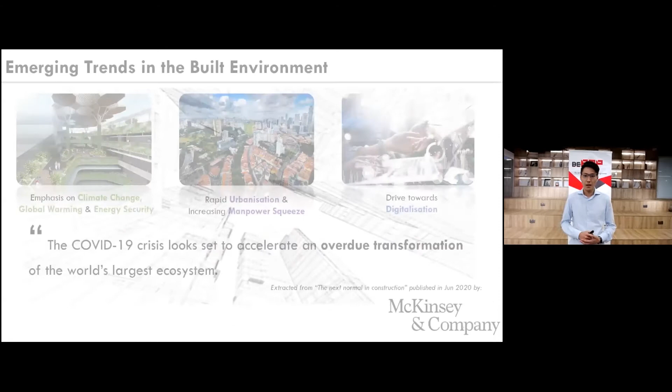The need for the built environment sector to embrace changes through business process re-engineering and technology adoption has never been greater than in recent months. Globally, 3 key trends are shaping the built environment sector. First, climate change and global warming have driven the need for more energy-efficient green buildings. Second, rapid urbanization and increasing manpower squeeze have also pushed the use of more technology in place of manpower. And third, advancements in digital technology are making smart building, digital design, and construction a reality.

The COVID-19 situation has also added new impetus for off-site manufacturing, safer workplace, and remote operations. Recognizing the 3 key global trends which are shaping the sector, we therefore started our transformation journey even before the COVID-19 pandemic. The launch of the Construction Industry Transformation Map, or Construction ITM for short, in 2018 sets the vision for an advanced and integrated built environment sector, led by progressive firms and a competent workforce. This vision is supported by 6 key thrusts to build innovation acumen, capabilities, skills, and markets through strengthening collaboration and progressive regulation.

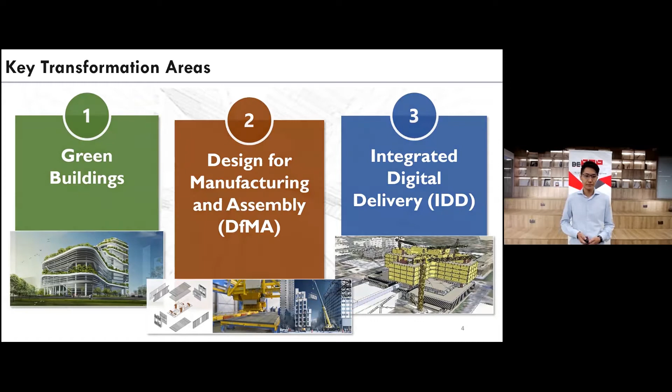To drive innovation and enterprise in these focus areas, BCA adopts a holistic approach. For example, with BEAMP, built environment firms are encouraged to pose their business challenges to the global innovation community. This is to widen the innovation base and to allow even proven solutions from outside our sector to be adapted for our needs.

Shortlisted innovators will develop the solutions with the advisory from the challenge owner, who will also provide a test bed for the solutions. In the process, innovators will also receive co-funding support and be plugged into the sector for market development.

While BEAMP provides a platform to drive innovation development, we are also mindful that regulations clearance may sometimes impede adoption for certain technology, particularly when the technology is new in Singapore. Therefore, BCA also provides a one-stop solution called the Build Innovation Panel, or BIP for short, to facilitate the review of existing regulatory requirements that may discourage innovations.

For innovation projects which require guidance in regulatory matters, BIP will help to pave the way forward at any juncture during the course of innovation development. We also like to point out that BIP also facilitates regulatory clearance for industry-ready solutions that benefit built environment, regardless of whether they came in through BEAMP.

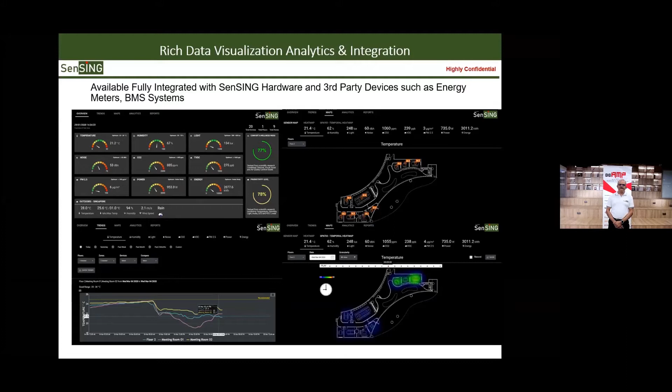We have a 3-step process: we sense, we analyze, and then we optimize through real-time data collection and monitoring, through multi-stage data analysis, and then we do impact analysis and recommend control strategies.

We are pre-integrated with our own sensors, but also with a host of third-party devices, including occupancy and other technologies, to provide a holistic solution.

Our signature is to be able to do a DIY type of performance where we can do plug-and-play installation and have up to 10,000 square feet of built environment indoor space up and running in 4 hours, with full visualization and data flowing at that rate.

We have multiple case studies. We have collected over 2 billion data points to date. We're only about 2.5 years old. We have a small team, yet we're very proud of what we've been able to achieve.

Here's just a few examples. Every customer has their own unique requirement. NUS, 5 locations on campus, looking at indoor environment quality and energy savings. DP Architects, the screen I showed you a little while ago, is looking at wellness and sustainability. And Henkel and Amazing Farm looking at the industrial factory environment and agricultural indoor farming, looking at yield and productivity.

What are we seeking? We're seeking partners for scalability, collaboration, new solutions. We're seeking funding to be able to expand our talent and expand our intellectual property. And finally, customers, not only in new verticals, but also in new geographies.

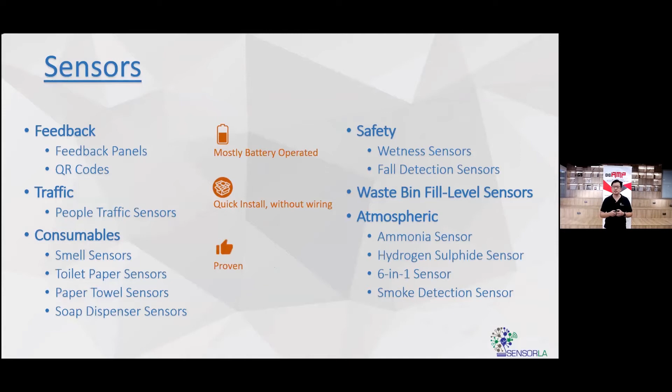So how have we done so far? I think we have been very successful. Only last year we had our first round of funding, slightly more than $500,000, and with that we have close to 30 locations in that short span of time.

What really makes me very excited and proud is customers are willing to go on national TV and speak to other customers, saying they used Sensorla's technology and had a 10% reduction in their overall FM contract costs. Other customers experienced as high as 35% reduction in time and manpower, though this depends on site to site, depending on your business.

The last thing I want to highlight is that we've gone very far in the last 1.5 years, and we are looking forward to a new deployment to a building in Hong Kong, our first step outside of Singapore. That's a 7-digit project we're looking forward to, and we're in the final stages of wrapping up the contract negotiations.

So we're really looking for funding to carry out the next step of this business. If you're interested as an investor, a partner, or even a customer to understand how we can help you, please contact me or my colleagues at this location. With that, I thank you and look forward to hearing from you.

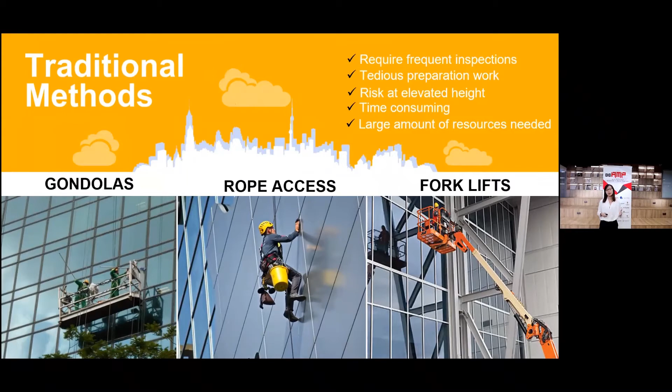This is where Alpheus comes in. Just some incidents to note from 2019: there were cases such as a man having to be rescued from faulty gondolas, a very tragic case where a worker fell to his death because the rope attachment snapped, and incidents where men were stranded 58 stories high due to glitches with the equipment used. This is where Alpheus comes in.

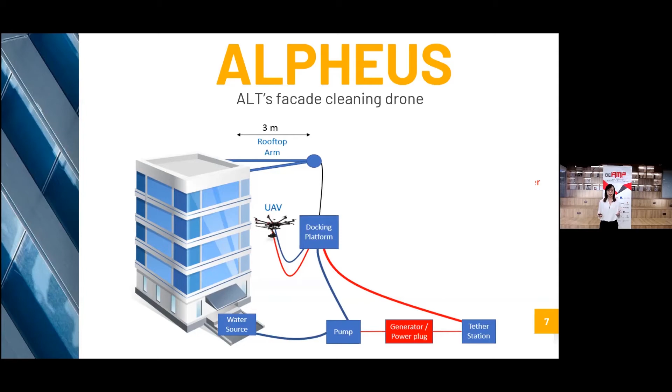Alpheus will be a tethered drone, tethered to a docking platform which will have the water source as well as the power generator. When tethered, this allows the drone to perform the whole operation before it actually has to land, because untethered drones have to land after about 30 to 45 minutes of usage. This really expands the time the drone can spend cleaning the facade.

Instead of taking photos, which is what most drones are used for, this will be a very specific drone, so its design will differ as well. There will be protection on the border of the drone so that we focus on safety, whenever it comes into contact with obstacles or hits a facade due to environmental factors — the drone is protected as well as the obstacle.

The drone will also have an agitation mechanism such that it replaces the person operating it. This will allow us to effectively remove stains that are on the facades as well.

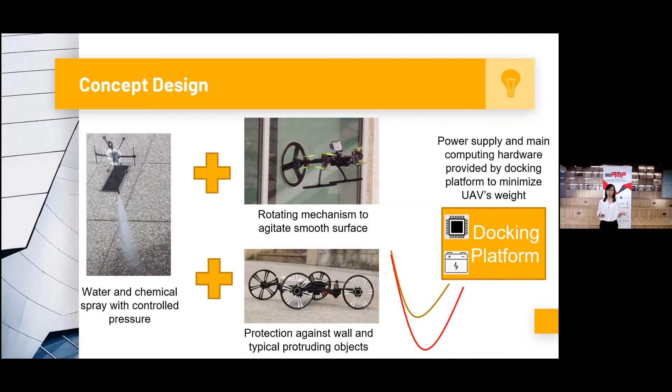Definitely, you have a water and chemical spray on the drone as well, so this is where we can deliver water or chemical agents to the facade. This is a brief overview of what I've just mentioned on Alpheus.

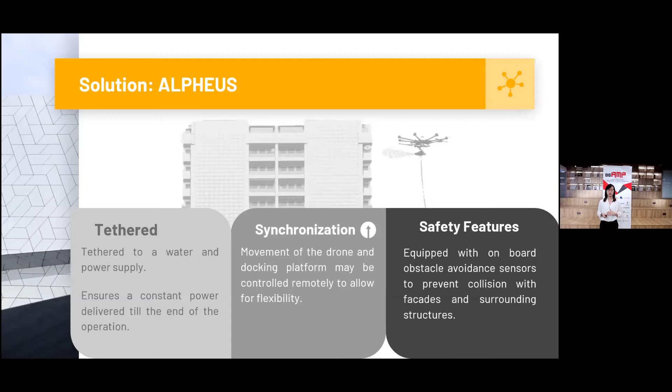It will be tethered as well as have synchronized movement, with a pilot on the ground controlling the movement of the docking platform as well as the drone. We also definitely look into safety issues — safety is a very big concern, so there will be obstacle avoidance sensors on the drone to minimize any damage or possible collisions with facades.

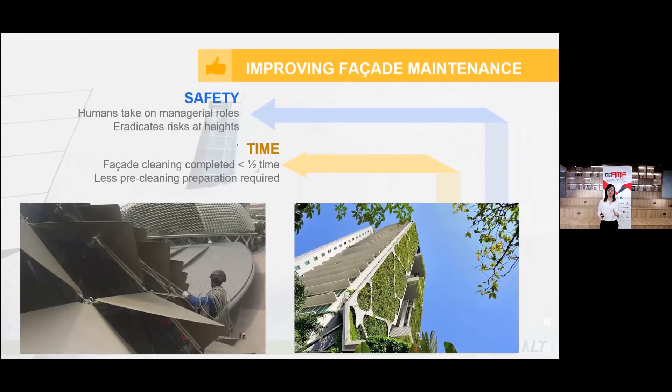Looking forward, there are many possibilities for a drone like this, such as with more green facades being developed in Singapore — we could use it as a mechanism to maintain these facades, watering them using the drone as well. You will see more and more buildings with very innovative designs where it's very difficult for workers to clean the facade, and this is where the drone can come in and replace the person.

We're looking for investors and building management that are able to provide test bed sites for us during this project, because we want to create a solution that is useful for you and benefits your building. We are also looking to work with companies with the appropriate PE resource and facade cleaning expertise, which will allow us to develop a solution tailored to your needs and requirements.

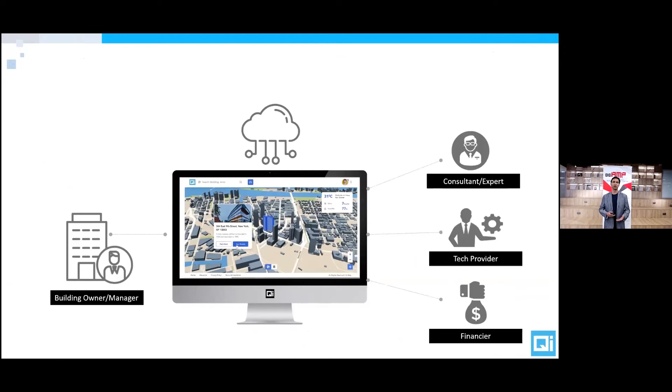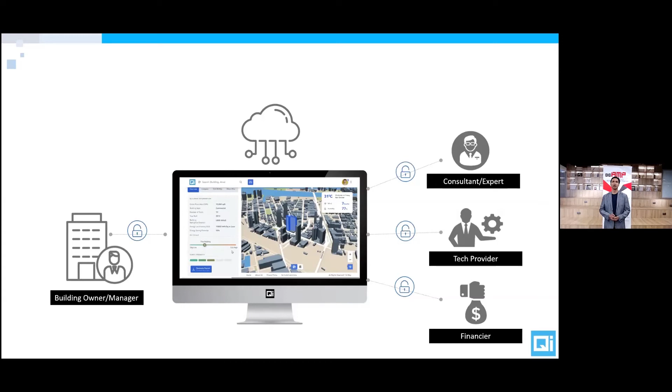Now we are taking our technology to the next level of the cloud. We would like to integrate cloud technologies and all our resources that we have in the past to create a Better Life platform. So Better Life platform is a cloud-enabled platform which makes it possible for building stakeholders to collaborate, work together. They would each be able to have a secure login access to the platform and be able to search around buildings, get the right data, collaborate, find the technologies, and find the right expertise wherever required.

We are launching this platform at this very event on the 1st of September, and we would like to now see how this platform takes traction and builds up with our partners that we're seeking for.

In terms of partnerships, we are looking for various sectors of partners, especially being on the cloud now as a cloud platform. We are looking for IoT providers whom we can integrate with, share data, as well as the right APIs to proptech companies. And we are looking at financiers also who would want to use our platform as a tool for them to assess buildings before they do any investment.

We are ourselves seeking investment. We are well seeded now. We are revenue positive. We have been able to go around the market and create value. We are now building up this platform which will accelerate our entire process of virtual audits, taking it to the next level. We have an MVP which is ready.

And now we are looking for a fund of 4 million with a pre-money valuation of 25 million, to be able to bring the technology to the market more aggressively, strongly, and also look at other geographies beyond Singapore.

We are a team of 7 people, and we wish to grow steadily, strongly, in a way so as to add value to the market, and at the same time, leverage on the cloud platform that we are creating, along with our people and the partners that we would encourage to join us. So with this, I would thank you, and I would like to welcome you to join us in our journey of creating digital buildings and a sustainable future through our Better Life platform.

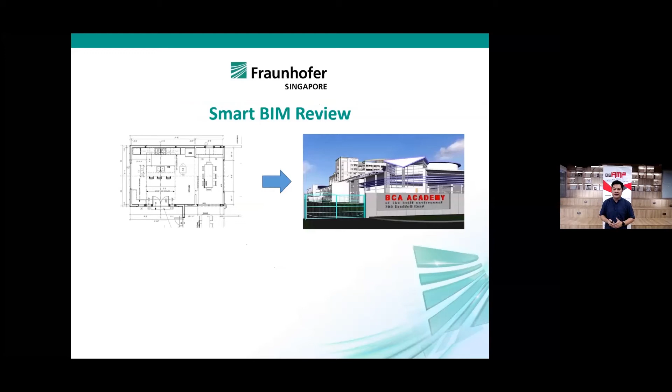Before I continue today, I would like to share this screen. We'd like to showcase this solution we call Smart BIM Review. Many times, BIM drawings are not easy to understand and relate, especially to their 3D model counterpart. The challenge here is to provide a corresponding 3D view to the architectural drawings.

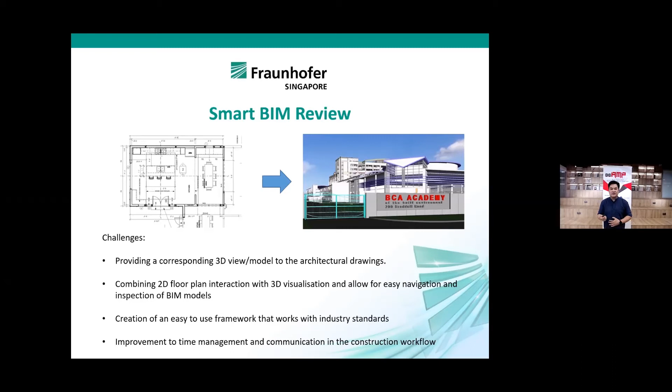We're able to combine 2D floor plans with 3D visualization to allow real-time navigation and inspection of models. We want to create an easy framework for everyone to use according to industrial standards, not only for design planners, but also down to the construction team managing the physical build-up. This allows for better time management and reduces miscommunication in the construction pipeline.

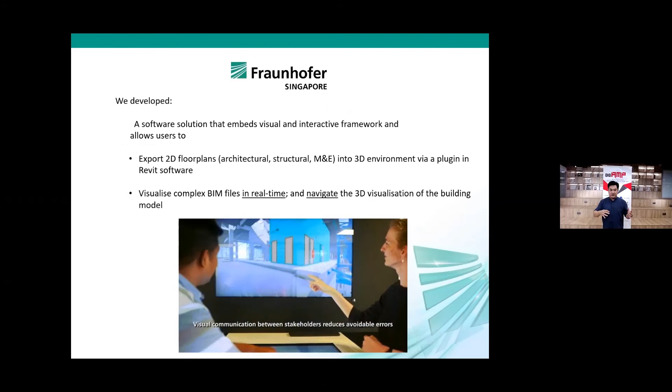So what have we developed? This solution embeds a visual and interactive framework. We allow exporting of 2D floor plans into the 3D environment, visualizing that in real time, and allowing navigation of the 3D models on the platform.

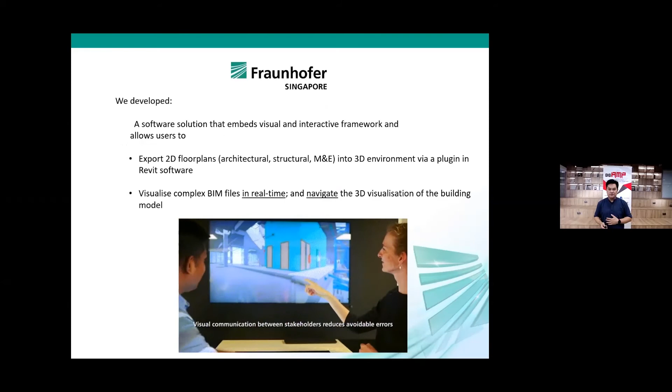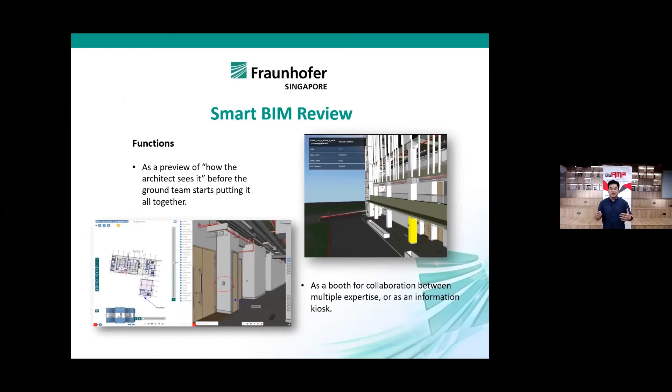As mentioned, before the designer sees it, we want this to be seen by planners as well, and everybody in the whole construction pipeline before the ground team starts putting it together physically. With all the people coming together, this becomes a booth for collaboration or an information kiosk for everyone to view the planning.

With all the floor plans in one place—architectural, structural, and M&E plans—this whole platform becomes a single portfolio of everything in one folder. Also, because of the 3D visualization, this can be a repository for all the 3D models as well.

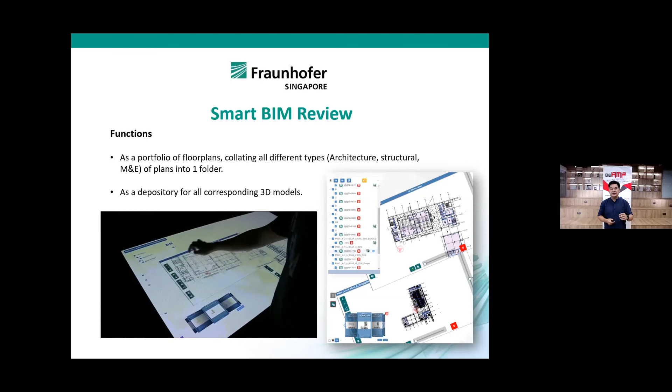So with all the 3D models and drawings in place, this also serves as a catalog for everyone - most importantly, not only the design planners but also stakeholders and construction people. Everyone is able to easily search for elements and highlight their locations. Subsequently, these can be saved as a screenshot or saved to file and taken out for further discussions.

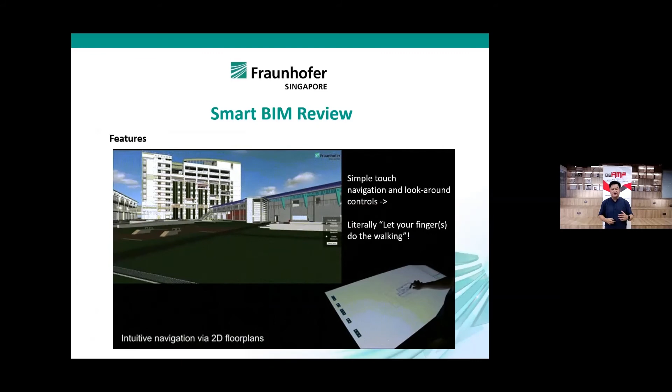As mentioned earlier, we want this to be an easy to use navigation platform. So literally, it's letting your fingers do the walking through using the floor plans and moving on to viewing it in the 3D models.

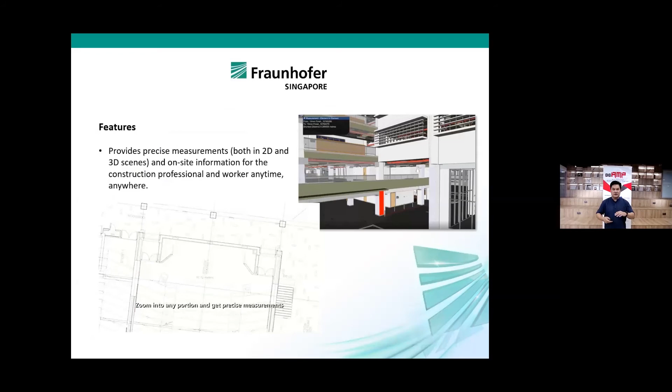Some of the further information we have is actually providing on-site measurements for further rectification of design issues. People can do this on the platform in real time. Other than that, end users can also come in and use this to slice and isolate certain areas of interest.

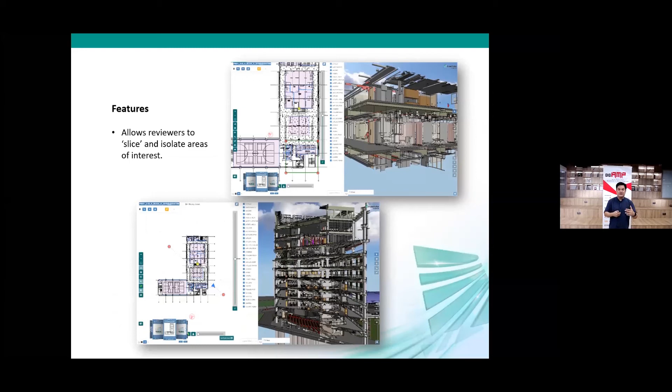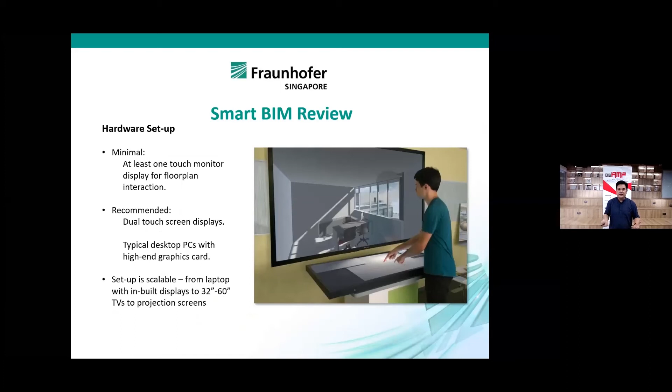For further planning, the hardware setup is not as complicated as you think - it's just two monitors, one for touchscreen, one for 3D. This is one of the recommended setups we have. Setup is easily scalable from laptop to even 3D projector screens.

So who are the people we are looking for? We're actually looking for collaboration with interested parties for customizing the software, and also resellers for distributing the software as it is. Interested parties can also work with us to test bed more BIM files, making it more robust, and also evaluate which features are needed in the industry - version tracking of buildings, especially during COVID now, since there'll be delays and changes in planning. So we are looking for partners who are able to collaborate with us on these things.

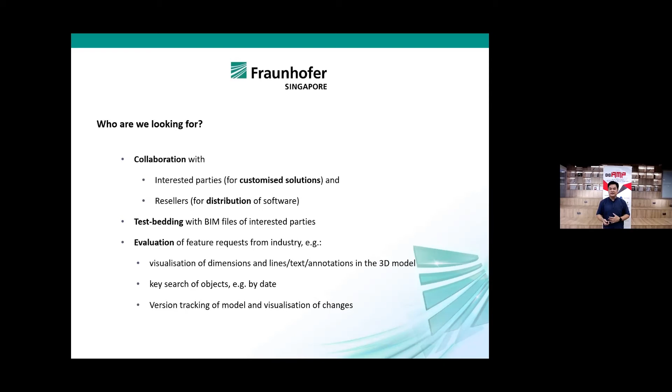Thank you, Fraunhofer Singapore. And lastly, we have Eutronics. Eutronics, together with Boustead, provide an integrated management system for the new Razer building.

Hi, my name is Mattia. Today I'm representing two companies: Boustead Projects, a Singapore real estate developer who is a leader in smart and eco-sustainable buildings, as well as Eutronics, an IT solution provider and system integrator specialized in smart building technologies, focusing specifically on delivering seamless user experience as well as operational automation and efficiency. Together, we are delivering the brand new Razer headquarter building, and let me share with you a little more on how we are going to be transforming the user experience in the built environment.